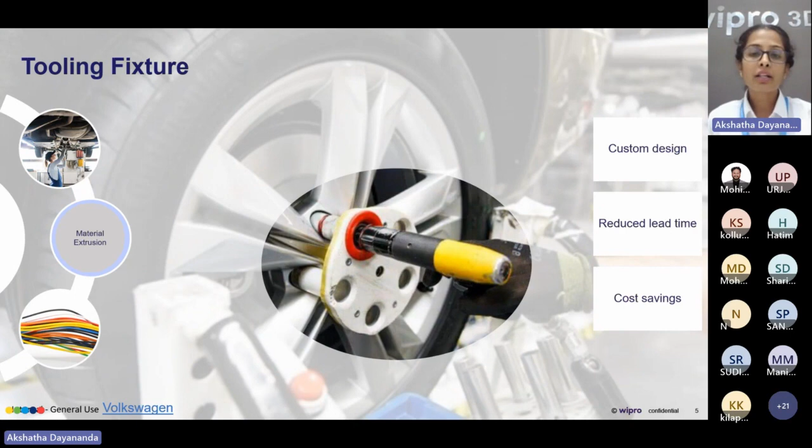With this, we're also seeing that material extrusion, also called FFF or FDM, is widely adopted. It is a technology which people are using to make many parts. Some advantages of this technology are that it is very easy to adopt and you can start printing with it very easily. Also, this is a kind of low hanging fruit, meaning it isn't too much of an investment to buy the FDM printer and start using it to see if it adds any value. So it's easier to adopt, right?

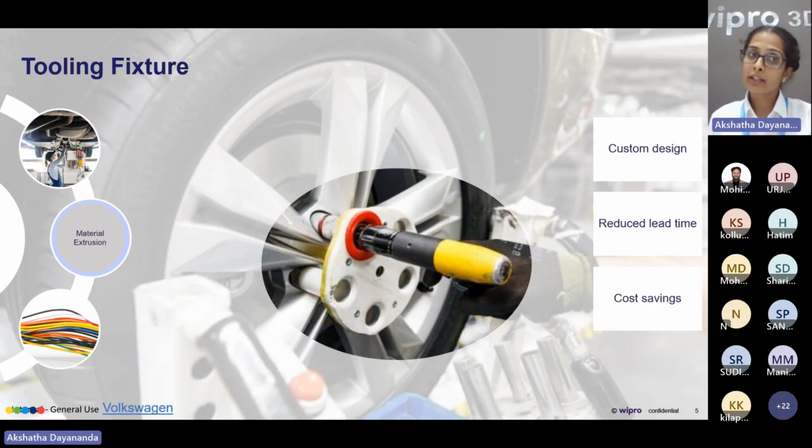And the raw material for this is basically wires, and you get the raw material also in different colors and at different costs and different kinds of material. So with this case study, I wanted to bring forward how one could adopt additive in a cost sensitive but big market like automotive, and how FDM technology is being used.

So continuing with polymer applications, I would like to discuss two other applications here. One is a joystick, used in gaming, and the other is a shoe sole. The joystick has been made by the SLS process. The material is nylon 12, and the shoe sole that you are seeing there is being done with the DLP technology.

Polymers again are finding a lot of applications in different industries for different reasons. It could be something like an ergonomic design, enhanced performance. It's also a market differentiator in certain ways.

Now, while we are on the topic of Adidas shoes and a shoe sole, I also want to emphasize that these additively manufactured things like the shoe sole - but also we've seen examples of guns used for shooting sport, some bicycle frames, eyewear, kayaks, surfboards, some prosthetics for sports people who are physically disabled or challenged, racing car components which are custom made to a certain racer, helmets for them, seats, and these kind of things.

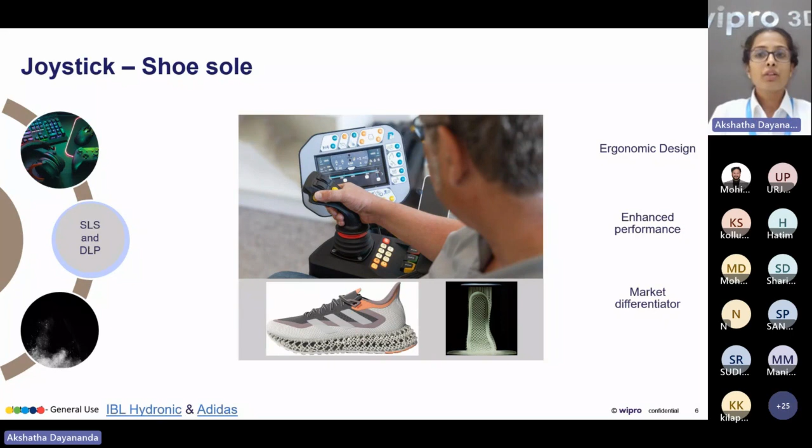So we looked at automotive, we looked at sports, and now I want to go into one sector which is very, very sensitive about certification and qualification and testing and all of these requirements. These industry verticals require a high degree of testing and qualification criteria. One of them is the aerospace industry, which includes both the aviation and the space industry.

Here is an example from Orbex, which is a UK company, and they have printed the largest rocket engine with composite and also aluminium, right? So they have done this in UK. But we've seen this repeat in many of the other cases.

There are space agencies all over the world printing a lot of their components with additive. Some of them may be in the rocket engine, which is super critical, with high pressures, temperatures, so you have to do extensive testing and all of that. And some of them are also printing really, really large parts, like the entire nose or the nozzle of the rocket. So Relativity Space is based in US and they are doing that.

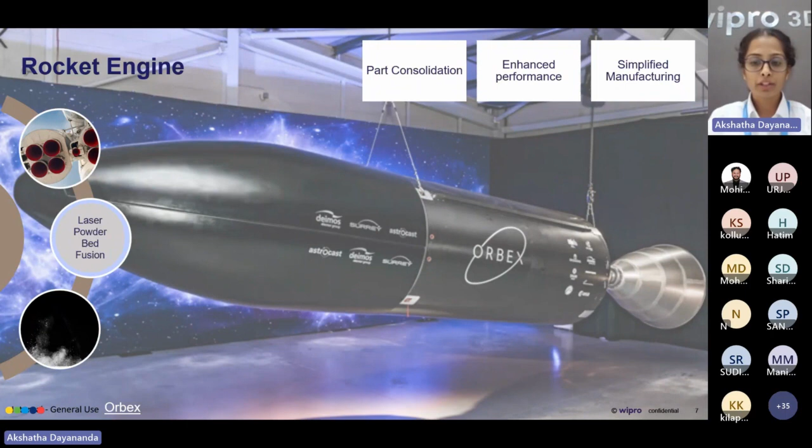With this, we move to another industry vertical which has been a very early adopter of additive manufacturing, which is the medical field. The picture you see here is of an implant - a spinal implant, and this is one category of components being made. The other category may be surgical guides, instruments, and these kinds of things.

So it's not only implants, but yes, when it comes to implants, mostly it is metal that is used. The technology being used could be laser powder bed fusion or electron beam powder bed fusion. I wanted to detail out the metal technologies as laser powder bed, electron beam, and in the next slide you will also see DED, because these are the technologies which are most mature to print metal parts.

Now the medical industry reaps another set of different benefits from additive manufacturing. It could be enhanced design, wherein you have the possibility that bone growth and tissue growth with these implants has been much better. It could be customization.

Customization is much necessary when it comes to trauma cases. For example, if somebody has had cancer and had to take away a part of their jaw, or they've had an accident and had to have a part of their skull replaced, and things like that. And this is one industry where the cost aspect of additively manufactured parts definitely competes with the conventionally made part.

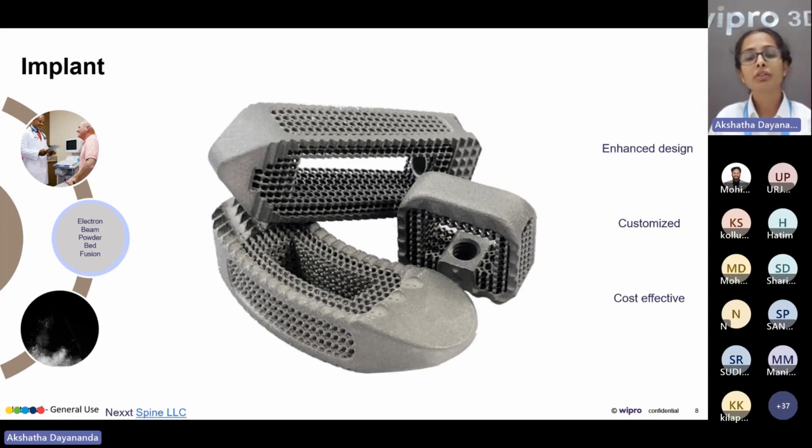So I'm only hoping that in the coming days, even the other industries will start to leverage this benefit from additive.

So the last global use case that I wanted to bring to you was this really big bridge that has been installed or assembled across a canal in Amsterdam. This was printed by a company called MX3D, and it's a steel bridge.

They printed it in parts and put it together. The reason I wanted to put in this slide is to show you how big it can get - additive is not only for small parts, but also for really big parts. The technology used for this is direct energy deposition.

With regard to DED, another aspect I want to stress is that one thing you can carry away is large - you can make bigger components. But the other thing is that repair is also another application which leverages direct energy deposition.

So when parts of the blade are worn out, or other components, then you use this kind of technology to repair those parts, refurbish them, and use them.

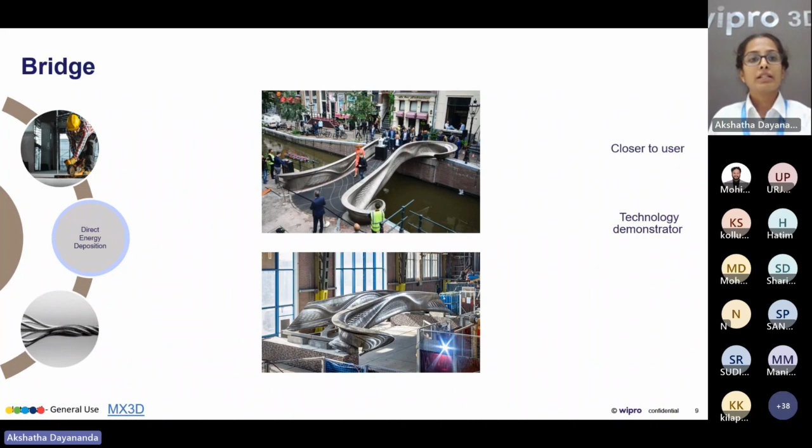So what we've tried to capture in all of the case studies that you just saw is that additive is being adopted across industry verticals. A few years back, we would probably say that aviation and defense is using it - they can afford to pay a lot of money, it's not cost effective, and things like that. But AM has found ways to add value to organizations in different ways.

Then we see that across materials, additive manufacturing is coming up - be it polymers, metals, ceramics, and different kinds of materials, additive manufacturing is making its way there. And there are quite unique and different technologies, and all of these technologies are adding value in their own way. It's not that one technology is superior and the other is not as good. So each one is finding its way in spite of the differences in the technologies.

Different people are using additive manufacturing for different value drivers. The value one industry or application derives may differ from another, but there is a whole range of value drivers across which additive is making its way. That was the picture I wanted to give you with all the case studies we discussed.

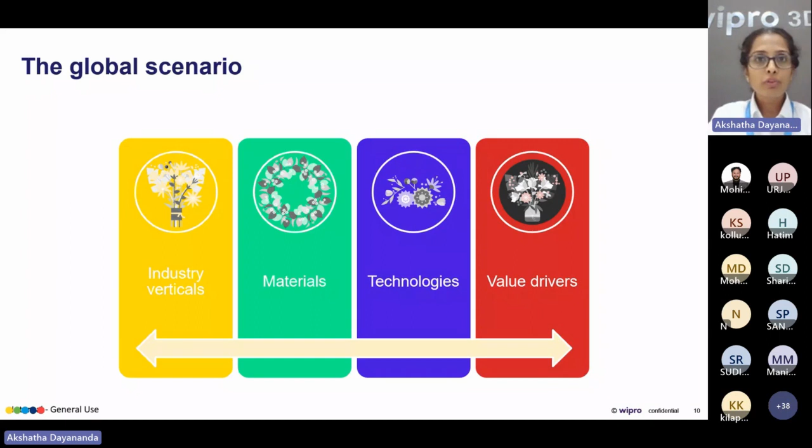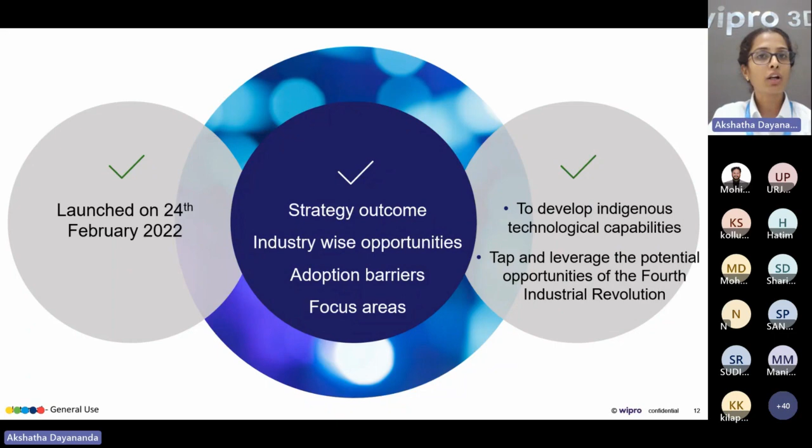So let's go into the strategy outcome and see what the strategy says. They have six very specific outcomes they would like to see: first, 50 India-specific technologies; second, 100 new startups; third, 500 products; fourth, 10 manufacturing sectors; fifth, 1 lakh new skilled manpower; and sixth, awareness and adoption of AM products.

If I try to consolidate this into 3 simple points, on top of the list would be innovation and IP creation, which needs to happen in materials, machine, process, software, and design itself. So there is a lot of innovation needed across different realms of additive manufacturing. The second point is a vision to set up manufacturing hubs of AM. The third is to develop awareness and skill people with additive knowledge.

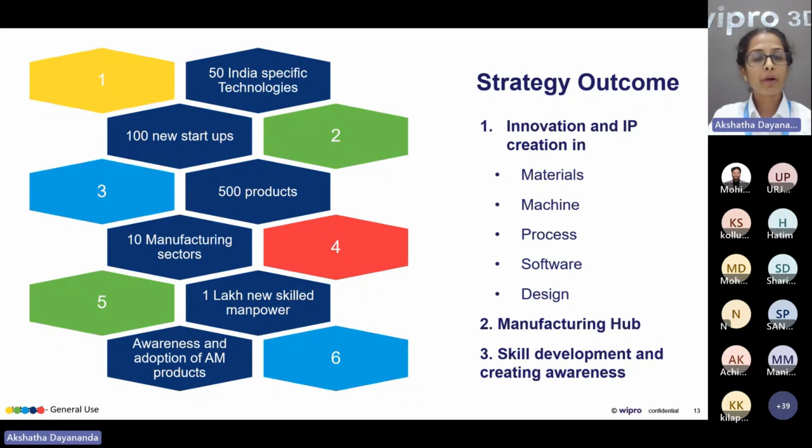So these are the outcomes discussed in the policy, but they have also identified relevant barriers. One barrier is processes and performance. Today, the most popular processes are probably laser powder bed fusion and FDM, and there are some limitations. With laser powder bed fusion, there's a size restriction beyond which we cannot go. With FDM, there's probably the speed of print compared to other polymer AM technologies. So there are certain limitations to the processes and how they perform - this is identified as one of the barriers.

Then we have material as another identified barrier. When it comes to material, the lack of data on additively printed material is definitely a barrier. The range of materials available to be processed through AM can also be considered a barrier, but there is constantly work going on to increase this range. So these are some material-related barriers.

When it comes to the AM ecosystem, since this policy is specific to India, we don't have a lot of powder manufacturers, for example, or people who can help with automated support removal or finishing operations. There may be a few, but it's not a big ecosystem in a way.

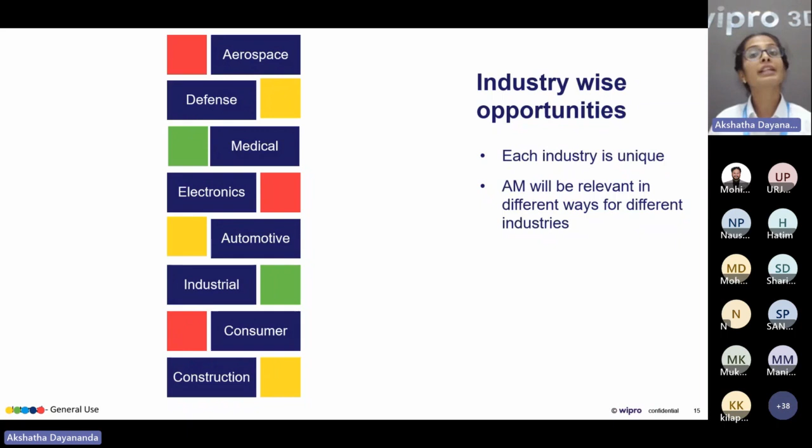So with that, I will then move on to the crux of it, wherein I will share with you what we think is the one, two, or three focus areas when it comes to this policy. So the policy is saying, design-wise, we should have new design methods, develop design tools, and also come up with new designs of applications.

When it comes to material, production of AM material at a lesser cost, adopting new materials, standardizing the material requirement or vendor qualification. When it goes to process, it's very clear: bigger machines, faster machines, and more accurate machines. And then to have stable, repeatable processes, and maybe to develop equipment also.

And for the entire value chain, what they're saying is develop cost models and tools, qualification and certification, and integration in supply chain. So this will all help in faster adoption of AM.

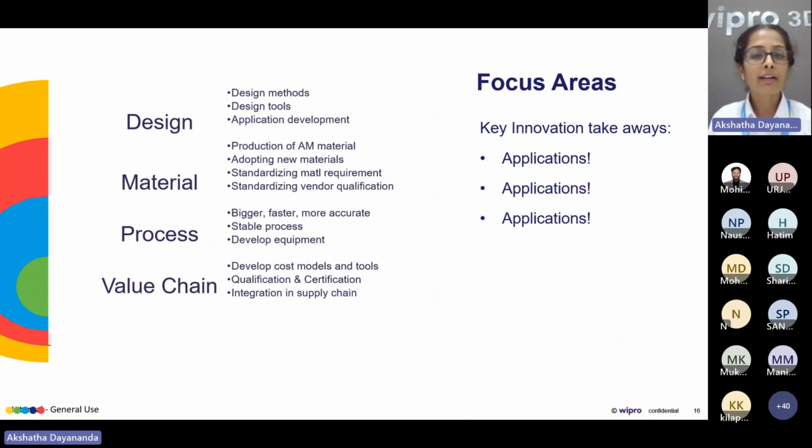But if you look at it, we think that the focus area is definitely unearthing those applications wherein you can have that most creative, unique design, or that application for which there is a material that can be processed through AM and gives an advantage and edge over everything else that was existing before. Or coming up with an application wherein you need to tweak your process, or innovate with the process to print that part, and again, applications wherein it will drive the value chain to support its adoption. So for us, I think clearly the focus area is finding those applications for AM.

So here I've put together about 4 use cases with which I would like to conclude this section on policy. If you look at the first example, which is the O2 Vent, this is from an Australian company. There is this condition called sleep apnea, where people don't breathe for a certain time, and it's quite dangerous.

So they have come up with this additively manufacturable design in nylon, wherein you put this in your mouth, and then your muscles won't collapse and you will not lose air. So you keep breathing throughout. So there's one innovation there from Australia. I showed you a lot of things from Europe and USA, so I wanted to show you one from that part of the world. And again, from medical, but not metal, and not an implant.

Now there is one more example, from Optisys. Optisys specializes, and its main business is to 3D print, to design-first antennas for satellites, which can only be achieved through 3D printing. So the component that you see on that palm actually used to be quite big, about a foot long. But with additive manufacturing, they've reduced the size of that component to such a small one.

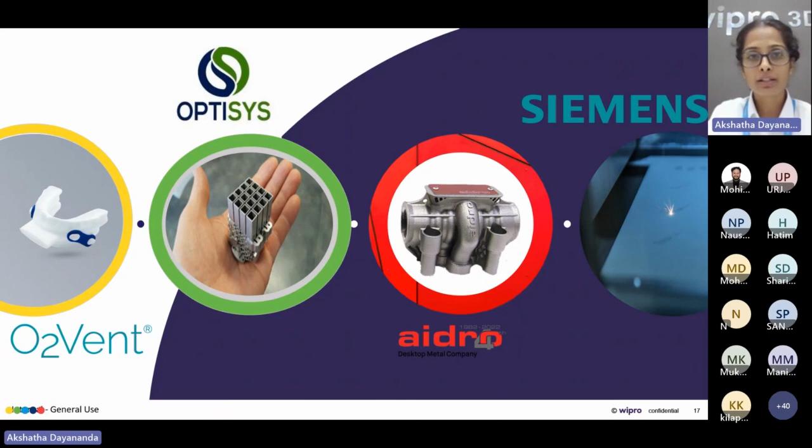All right, so I will quickly move on to the last section, wherein I would like to highlight how AM is being adopted in India. And what I've done is, taking inspiration from the national strategy, I have listed only about 2, 3 areas, but I've made sure I covered most of the technologies.

Now let's start with defense. We see that the defense sector in India is willing and is already adopting AM very willingly. One of the examples you see on top there is a gun for personal defense, and they customize the handle to the person using it, and some other components they are customizing too. But I think the real value is that let's say some component of this gun fails when they are on the field. Now they do not have to wait to order the spare parts, get it, or maintain an inventory or anything like that. If they have a printer, they can print different sections of this and continue to use the equipment. So that's one of the values that the defense sector is deriving from it.

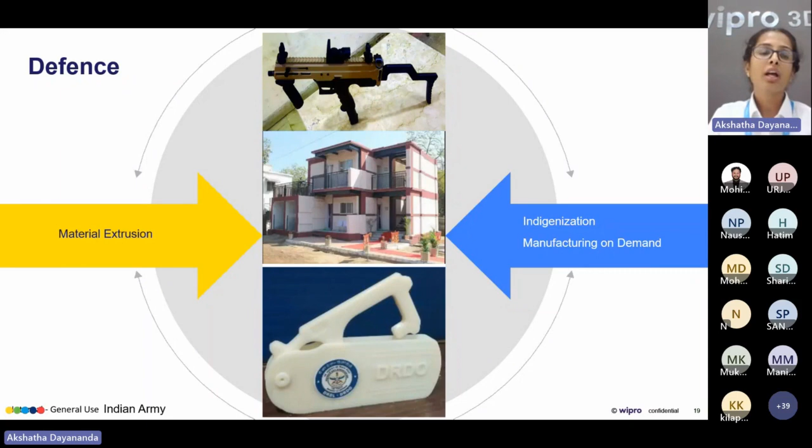So again, quite a critical sector, but moving to another sector, here we have aerospace. In our case, I've listed two examples from ISRO, Indian Space Research Organization. They are our pride, nation's pride, and they have been using a lot of additive manufacturing. The product you see on top is made through laser powder bed, and it's quite big, but not too huge. But the one you see below, that is made through direct energy deposition, and a really large part.

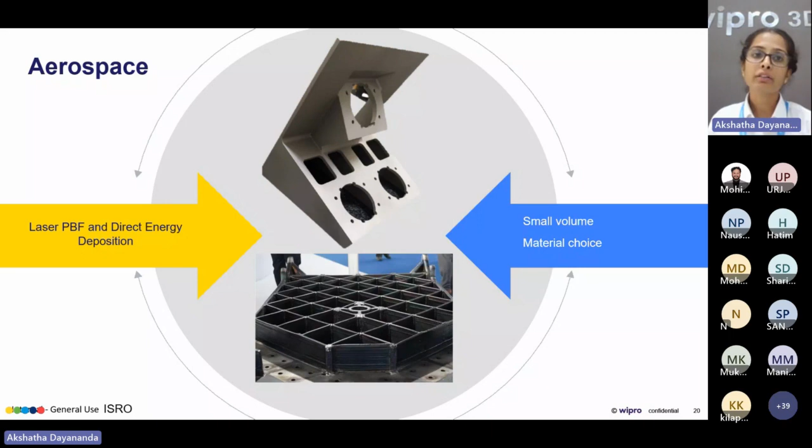So the benefits that they are reaping there, like I mentioned before, is small volume, and also they are exploring different materials that can be done. Now, with a lot of startups, both in the space sector, be it launch vehicles or satellites, or drone startups making their own drones, we see that they are adopting additive manufacturing at a very high rate.

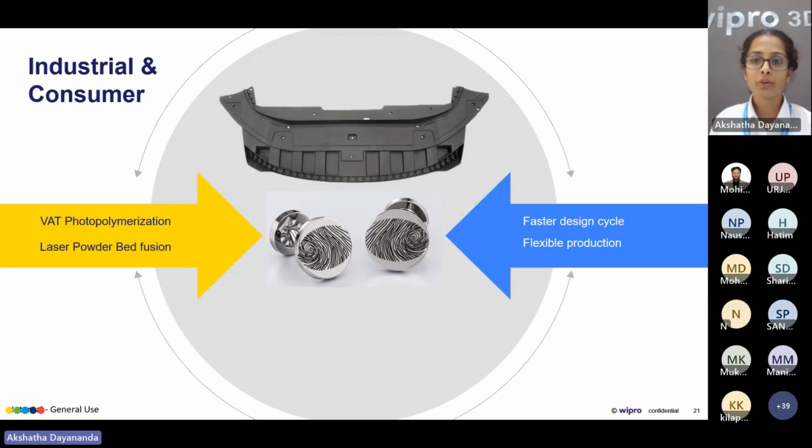While I'm very proud of that, I also want to mention that after that we have certified several other parts for defense and aerospace sectors. With this, we have developed the experience and knowledge of what it really takes to make components that need rigorous testing and certification, and what to do when there are not many standards existing. How do you understand the process variables in the machine or process, and how do you control them? These are some of the things we've been able to learn and develop because of such opportunities.

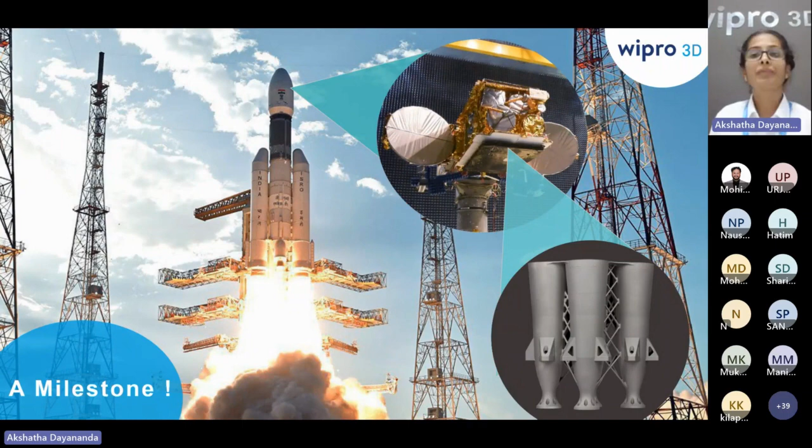And that's us, Wipro 3D, some of our offerings. We do printing with metal and with polymer. With metal, we have laser powder bed machines in-house, and for polymer we have MJF, FFF, and DLP printers. We also offer services in additive design and engineering. So if you have a design in mind that you want to adapt to be 3D printed, or a fresh ground-up design and you want to understand how to do it for AM, we help you with that.

We also have our own products. Last year in November, we launched our dual nozzle FFF printer commercially. Then we have our DLP 3D printer, which isn't yet commercially available. We also have additive manufacturing labs where we supply 3D printers, but we also go around and discuss what can be done with the machine, how you can skill people using it, or what kind of research you can do with these machines, and IoT labs as well with the same purpose. We offer turnkey solutions where we understand your requirements, suggest what kind of machines you may need, procure them, place them in your center, run it for you for a few years, and hand it over when you feel comfortable doing it on your own.

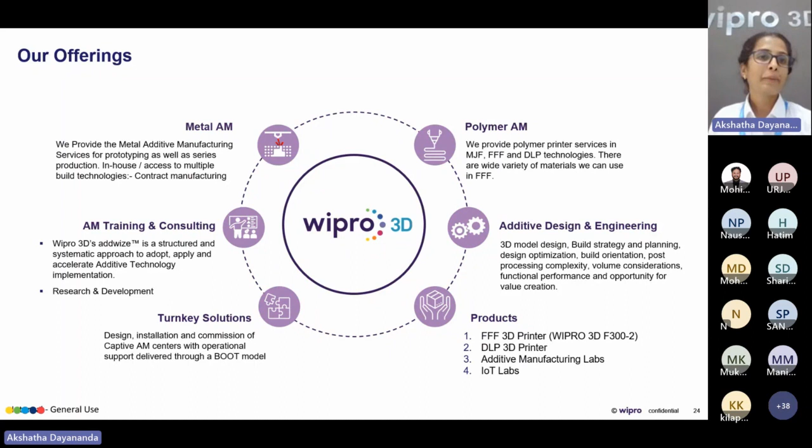We also do a lot of AM training and consulting, which is my department as well. And with that, I would like to conclude and open the session for any questions you may have.